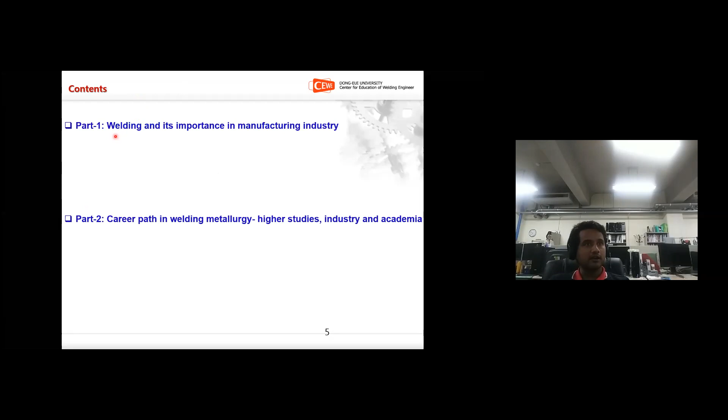This is the contents of my presentation. I have divided the whole presentation into two parts. Part one is welding and its importance in manufacturing industry. Part two will discuss the career path in welding metallurgy, higher studies, industry and academia. Finally, I'll summarize my presentation.

We'll start part one, welding and its importance in manufacturing industry. Here I'll discuss the importance of welding in manufacturing, then the basic definitions of key terminology such as welding, weldability, and welding metallurgy, the different welding processes, the structural building blocks of welding technology, and finally the important part: the need of metallurgist in the welding industry.

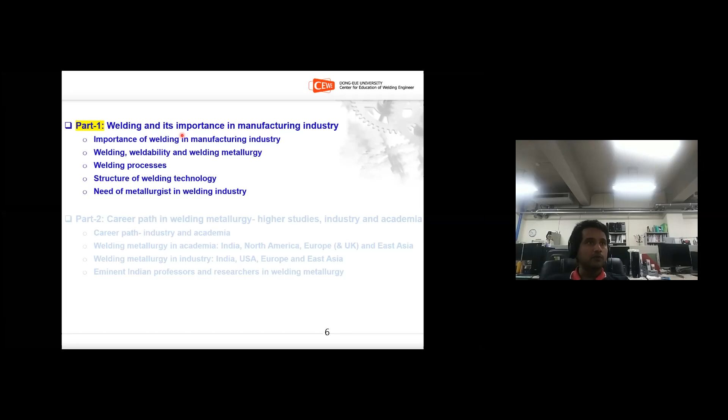I will start part one, the importance of welding in manufacturing industry. To explain this, I think it is easy to use an example, so here I'm taking the example of the automobile industry. If you take the automobile industry, these are the four basic blocks of automobile body manufacturing.

For example, here we are making a car body with steel, and basically steel sheets are used for making the car body, which comes from the steel industry. In the steel industry there are processes like iron extraction, steel making, casting, rolling, heat treatment, and sometimes coating. After these metallurgical processes, sheet steels come to the industry and are first fed to a press shop.

This is actually the structure of a car body, which we can call the skeleton of a car. Let's see what happens in the press shop. These car bodies consist of various components; for example, here you can see the B pillar, this is the A pillar, this is the B pillar, and this is the C pillar.

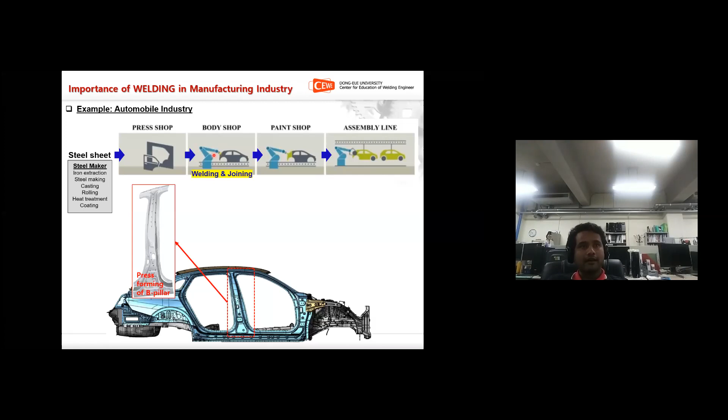So welding and joining are happening here. If you magnify this portion, you'll see a lot of yellow and green dots - these represent the locations of resistance spot welds. In the body shop, most of the automobile industry uses resistance spot welding for assembling the body parts. So the components enter the body shop as separate parts and leave as an integral, assembled component.

The assembled component is then sent to the paint shop, where it is coated with primer, secondary, and tertiary paintings. Finally it goes to the assembly line where the remaining non-metallic parts are added, and then it is sent to the next level.

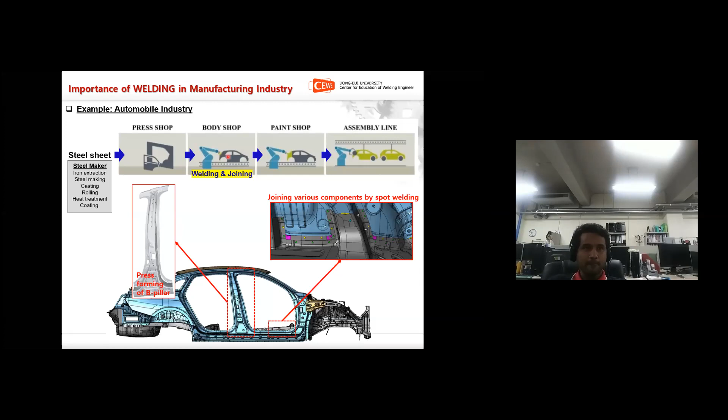Here we'll see the basic definitions of important terminologies like welding, weldability, and welding metallurgy. We'll start with welding. What is the definition of welding? What do you mean by welding? Simply, we can say it is the joining of two materials into one by using heat or pressure or both.

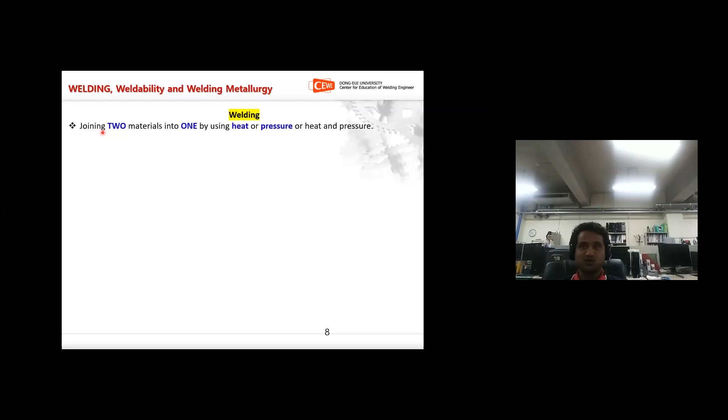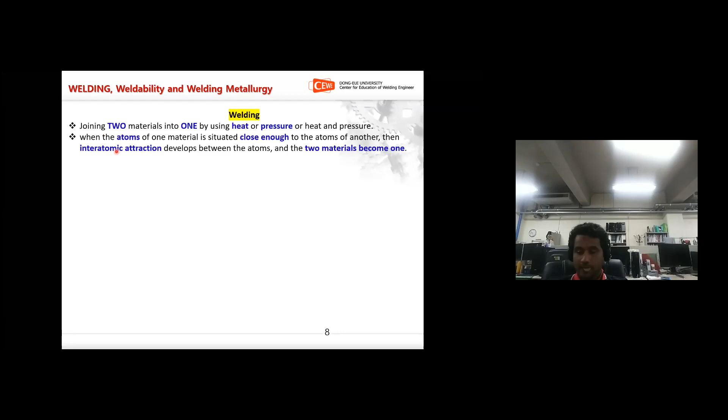But how are we joining two different materials into one? When the atoms of one material are situated very close to the atoms of another, interatomic attraction develops between the atoms, and the two materials become one. Let's see this with a schematic diagram: on the y-axis is cohesive force, which is the interatomic attraction force, and on the other axis is the separation between the atoms, which is the distance between them.

This region will have the maximum interatomic attraction between the atoms. If you keep two atoms at this distance, they will have the maximum interatomic attractive force. Now let's consider the atoms of material A and material B.

Let us assume the atom of material A is situated here and B is located here. If you see the distance between A and B, they are located far apart, which means there will not be any interatomic attraction between them. In order to have interatomic attraction, we need to bring B into this region so that it will have the maximum cohesive force or maximum interatomic attraction force.

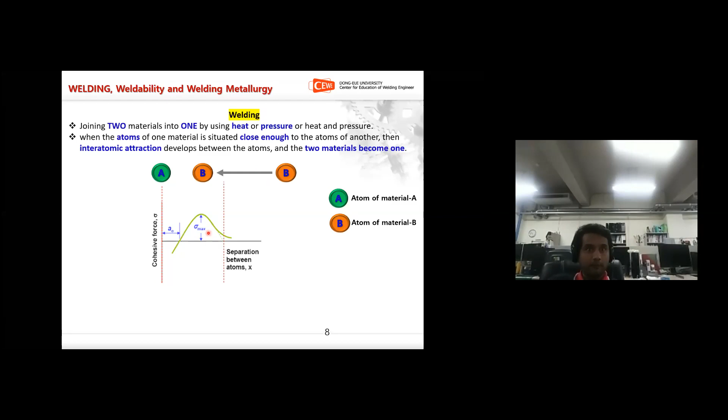But it is not easy to bring B into this close distance because there will be a lot of repulsive forces acting against the movement of B, such as the surface energy of material A, impurities on the surface of material A, and some other surface irregularities. But in welding, we are providing heat or pressure or both so that we can overcome such repulsive forces.

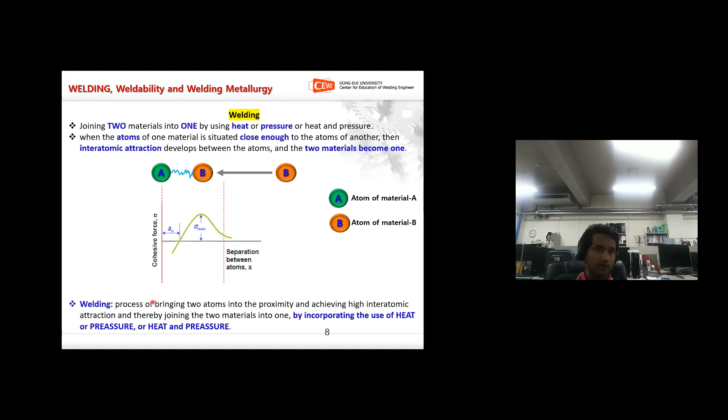Bring B into close proximity of A so that there will be a strong interatomic attraction. So using this concept, we can easily define welding: it is a process of bringing two atoms into proximity and achieving high interatomic attraction, thereby joining the two materials into one by incorporating the use of heat or pressure or both. I hope you understand the basic definition of welding.

Next is weldability. According to the American Welding Society, weldability is the capacity of a material to be welded under fabrication conditions imposed into a specific, suitably designed structure and perform satisfactorily in the intended service.

Simply, we can define weldability as how easily we can weld a material and how well the material can perform its intended application after welding. That is a simple definition of weldability. So in the manufacturing industry, we consider weldability as an important property of the material.

If you consider the job of a metallurgical engineer or researcher working in welding metallurgy, he'll always be evaluating the weldability of materials, especially new materials.

Here you can see an example. Normally we say steel is having higher weldability than nickel, which is having higher than aluminum, and so on.

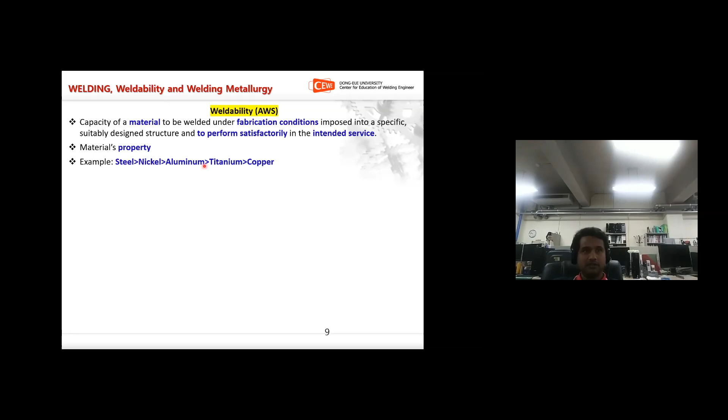Another terminology is welding metallurgy, which is considered a subset of metallurgy that studies the metallurgical phenomena during welding. Why is welding metallurgy important? Why can we not consider it as just physical metallurgy? Why is there no other heat treatment metallurgy or casting metallurgy, something like that?

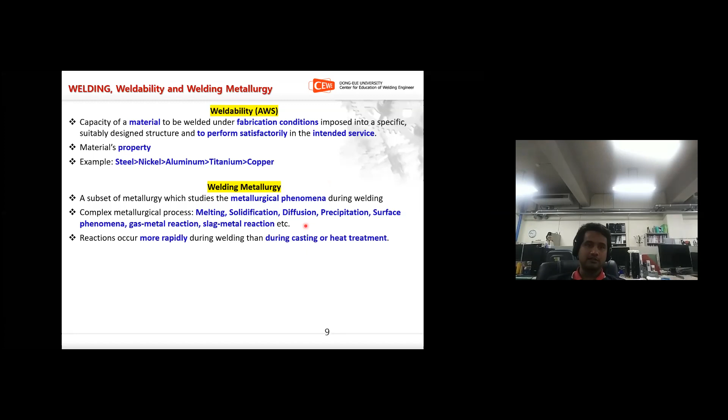Because welding consists of a lot of complex metallurgical phenomena, such as melting, solidification, diffusion, precipitation, etc. And these phenomena or reactions happen more rapidly during welding than in any other manufacturing processes like casting or heat treatment. So this rapidness in these metallurgical phenomena makes welding unique and challenging.

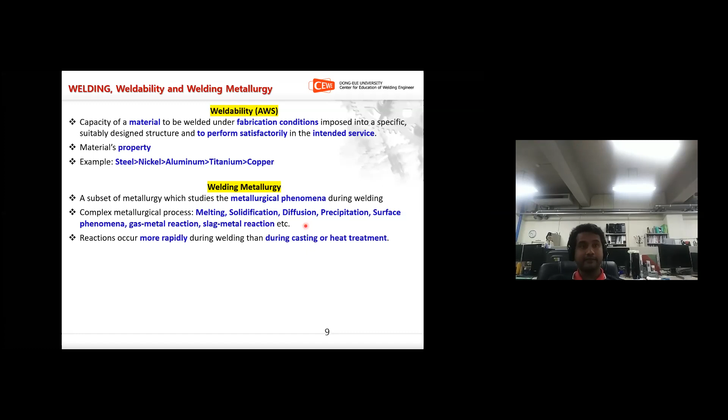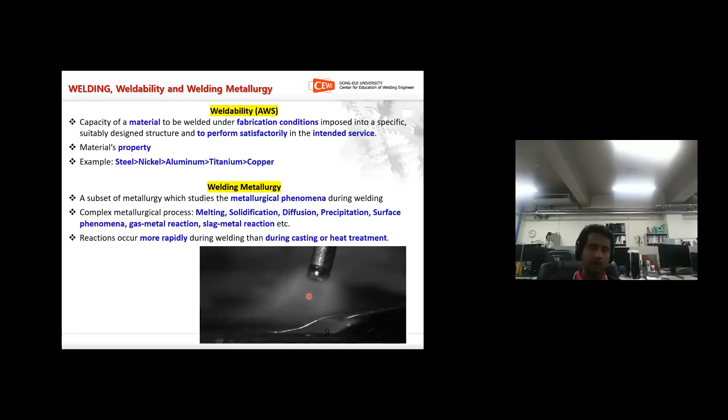First, an arc is established, and the heat energy from the arc melts the filler wire. So melting is happening here. It becomes like a molten droplet, which is transferred to the existing molten pool, and which will be solidified here.

After solidification, there may be other phenomena like phase transformations. It can be diffusional phase transformations, or it can be diffusionless transformations.

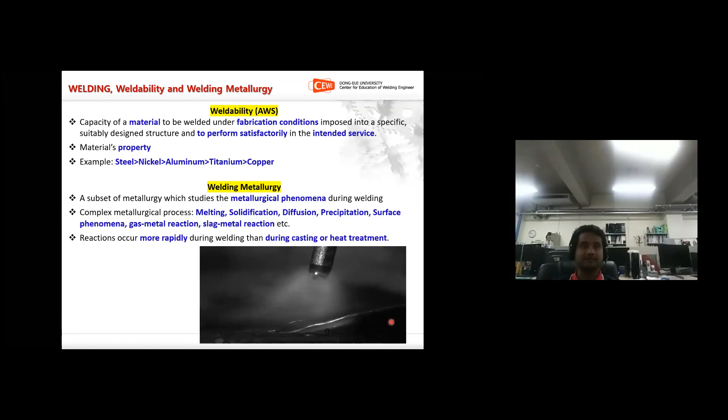Now, welding processes. You will see a lot of different welding processes in different industries. Based on the industry and based on the material, we will have different types of welding processes.

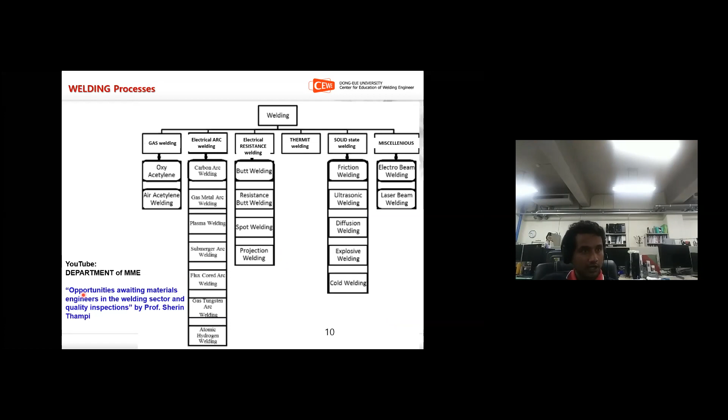I'm not going deep into different processes because you will see one of the previous webinars conducted by Amal Jyothi College. You will find the video on the YouTube channel of the Department of MME, titled 'The opportunities awaiting materials engineers in the welding sector and quality inspections' by Professor Sherin Thampi. If you're interested, you can visit that. There, Professor Sherin Thampi has explained all the types of welding processes.

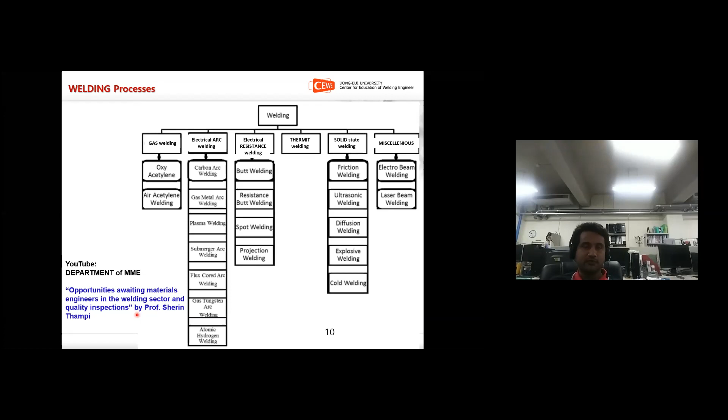Next is the structure of welding technology. If you look at the structure, you will see 3 major building blocks in welding technology: process, metallurgy, and design.

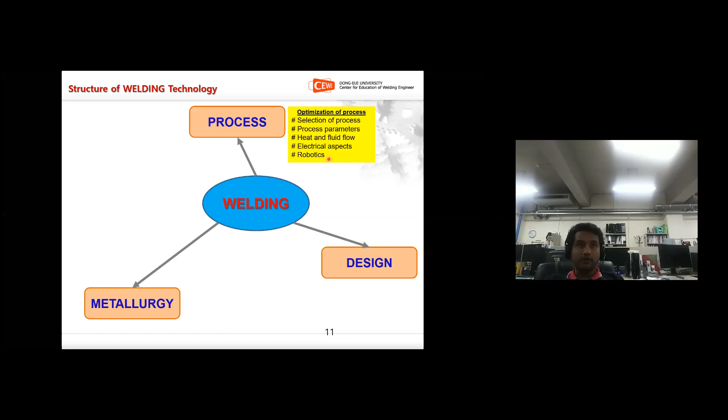Process is basically the optimization of the process, an interdisciplinary area in which mechanical engineers, metallurgical engineers, electrical engineers, or even electronic engineers can contribute. Here, selection of processes based on application and material, process parameters, heat flow and fluid flow will be studied. Electrical aspects like welding power sources, welding machines, and robotics are included too, since most welding today has become automatic using robots. So we should have experts in robotics to make automated weldings.

The second part is metallurgy. Here we study the response of materials during and after welding, especially changes in mechanical properties, corrosion properties, and changes in structure—what we call microstructure, and sometimes nanostructure, since we may need to go up to the atomic level to see the structure of material after welding. Another aspect is cracking and other defect formation, and chemical inhomogeneity happening during rapid solidification and phase transformation. This part is exclusively for engineers and researchers with a strong background in metallurgy.

The next part is design of welding. This is exclusive for mechanical engineers. Dimensions of the welds, number and locations of the welds, loading and stress distribution, and residual stress distribution will be analyzed in this part.

So till now we have seen the importance of welding process in manufacturing industry, and the basic definitions of various terminologies and welding processes. But here we are going to see the need of metallurgy in welding-related industry. I think the best way of explaining this is by picking some examples from various industries.

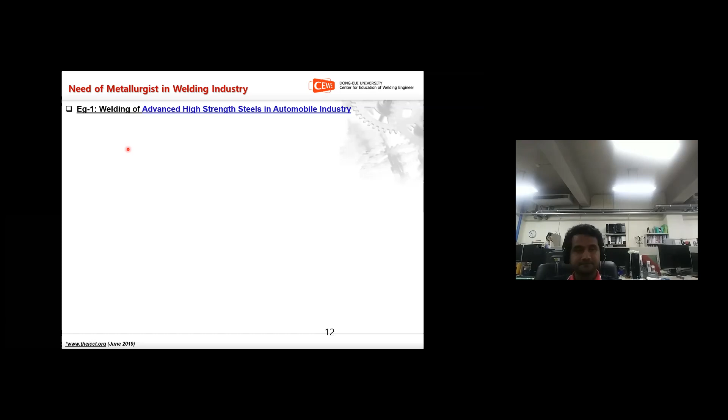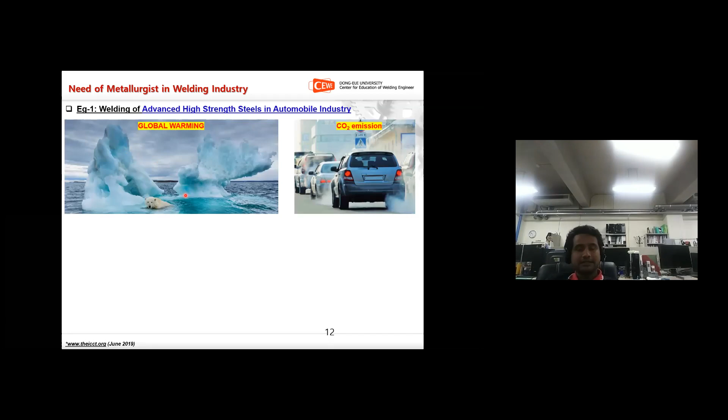As a result, various government agencies have put very strict regulations on fuel consumption and carbon dioxide emission. As a result, you will see reduction in carbon dioxide emission as well as fuel consumption in various countries—Korea, Europe, Japan, India, and others. Some countries have set future quantitative targets as well.

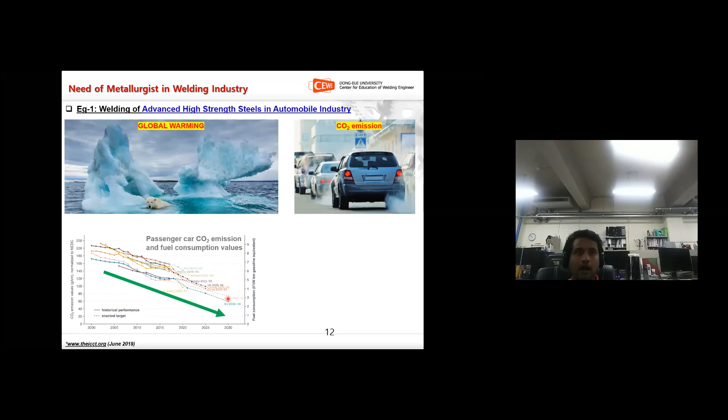How are automobile industries achieving this reduction? It is through lightweight technology—automobile manufacturers are reducing the overall weight of the automobile. For example, a reduction of 380 kilograms of car body weight can result in a 40% reduction in carbon dioxide emission. So this is a very effective strategy to control carbon dioxide emission.

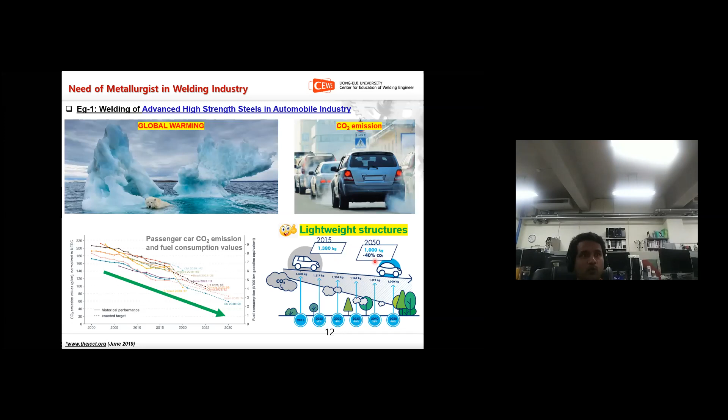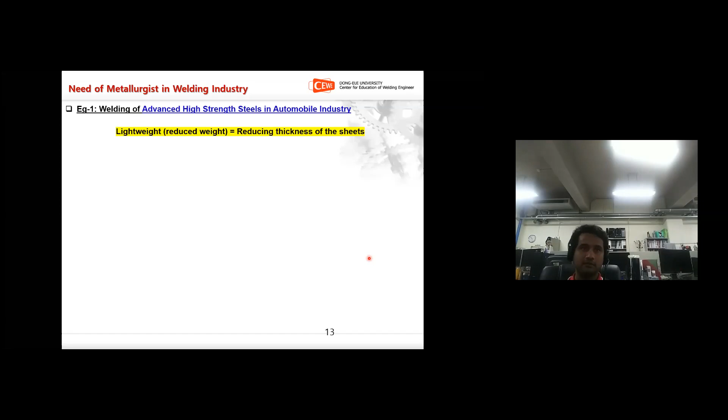How are they achieving this weight reduction? By reducing the thickness of the steel sheets. We have already seen that sheet materials are used in car body manufacturing, so they reduce weight by reducing sheet thickness. But there is a problem—we cannot simply reduce the thickness of the sheets.

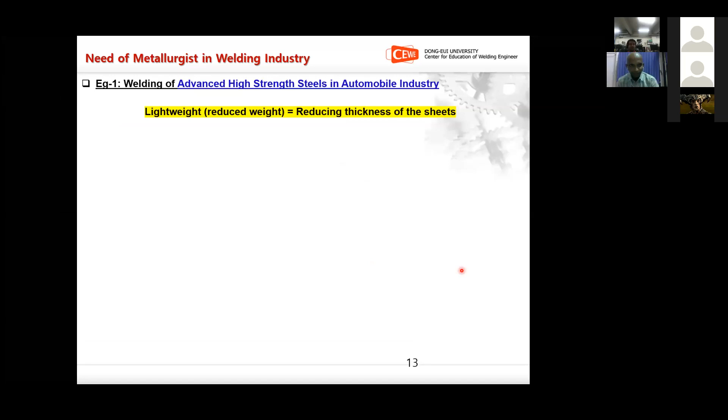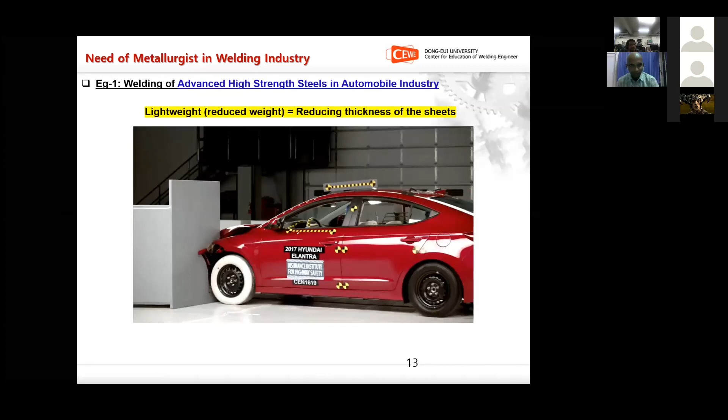This is called a crash test, used for evaluating crashworthiness and passenger safety when an automobile is involved in an accident or crash. A collision or accident is simulated here. If you simply reduce the thickness of the sheets, we cannot ensure passenger safety. So this is another problem opposing the lightweight strategy.

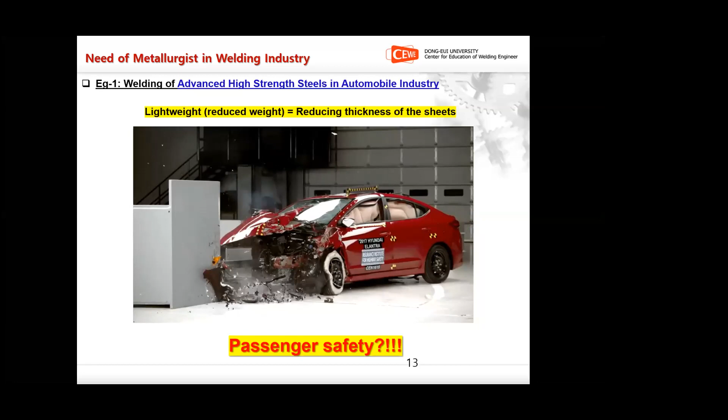There are a lot of requirements for automobile manufacturers. One is reducing weight by reducing the thickness of the sheet metal, but they cannot compromise passenger safety—the property needed is strength of the material. Another requirement is easiness in making shapes. We have already seen the press forming process—if the material has high formability, it will be easy to form into desired shapes.

Now there is a problem: these two properties, strength and formability, oppose each other. There is a trade-off between strength and formability—if we try to increase strength, there is an automatic reduction in formability, and vice versa.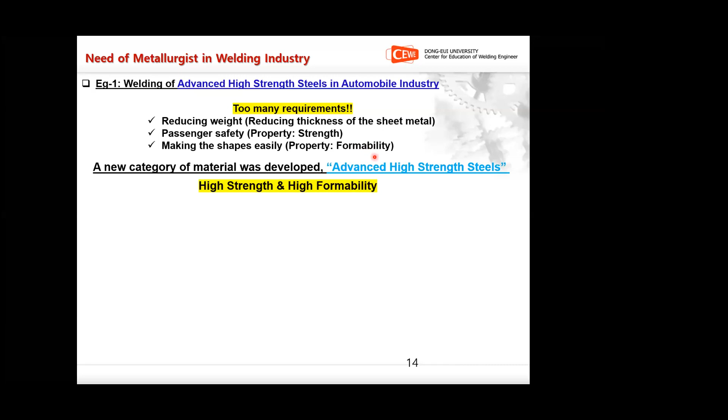But anyway, we have to achieve all these requirements. So steel researchers have come up with a new category of steels called advanced high-strength steels with high strength and high formability. This chart shows various types of steels, in which green represents the conventional steels: mild steel, low carbon steel, interstitial free steels, and high strength low alloy steels.

And from 2000 onwards, a new category of materials, these advanced high strength steels, evolved, and these are some of the examples.

This red color and blue color indicates those advanced high strength steels. So you will see in the x-axis it is strength, tensile strength, and y-axis it is elongation, which is a measure of formability. So we can have a satisfactory level of formability and strength if we choose advanced high strength steels. This is the background of advanced high strength steels, and this is developed by improving the chemical composition and applying some special heat treatments.

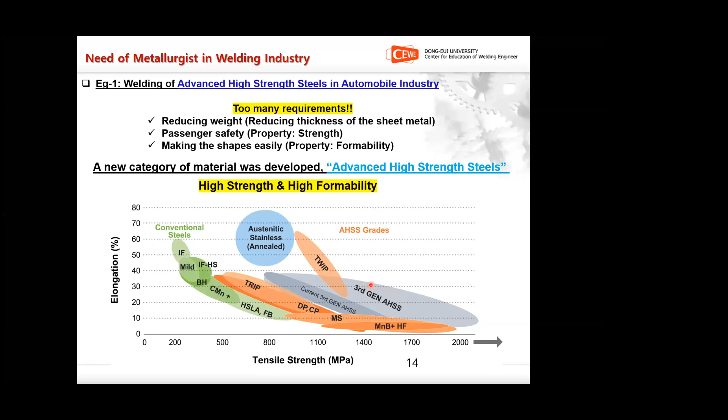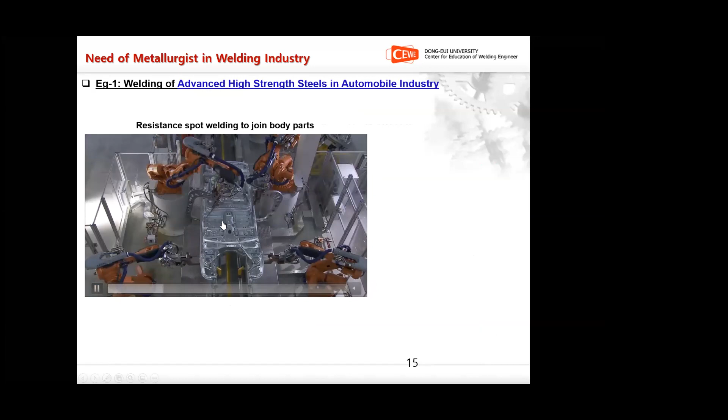And now we need to weld the advanced high strength steels to make the automobile structure. Most of the automobile industry uses resistance spot welding. This is an automated resistance spot welding in an automobile industry. You will see the electrodes are coming and making the welds. These are the electrodes, coming and making the spot welds like this.

Now let's see the schematic of this same process. These are the two steel sheets, and we have a water-cooled copper electrode. Electrode force or pressure will be applied so that this electrode holds the materials together, and then electric current is passed. When current is passed through a resistor, based on the Joule heating principle, there will be heat generation. Using that heat generation, the steel sheet interface will be melted and resolidified as a weld nugget. So this is called a weld nugget.

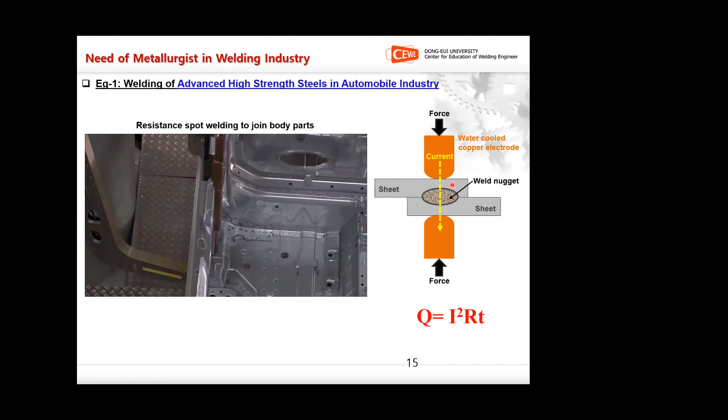If you make a large weld nugget, we can call it a good weld. If the weld nugget is small, we call it a poor weld. So this is the phenomena happening during resistance spot welding.

Now let's see the magnified view of resistance spot weld. I mean this region, and this is the water-cooled electrode. These two are zinc-coated advanced high strength steels. Why are we applying zinc coating? Because we need to control the corrosion. That's why we are applying zinc coating.

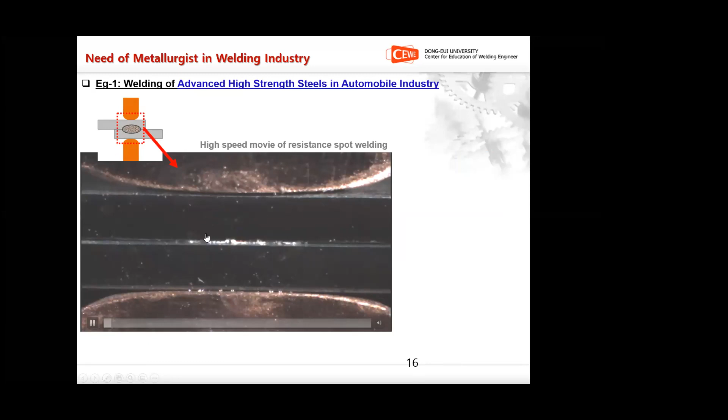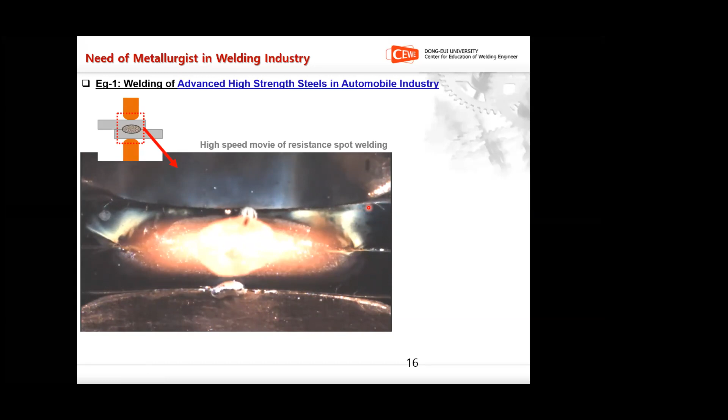So let's see what is happening. This is a high-speed camera movie. Current is passed, and you will see the melting of the coating. Here the coating is melted, and here the steel has been melted. At the same time, if you look carefully, you will see a lot of crack formations - here, here, here, and after some time here also. So these electrode-sheet interfaces experience a lot of crack formation.

So these are called cracks, and almost all the interfaces are having cracks.

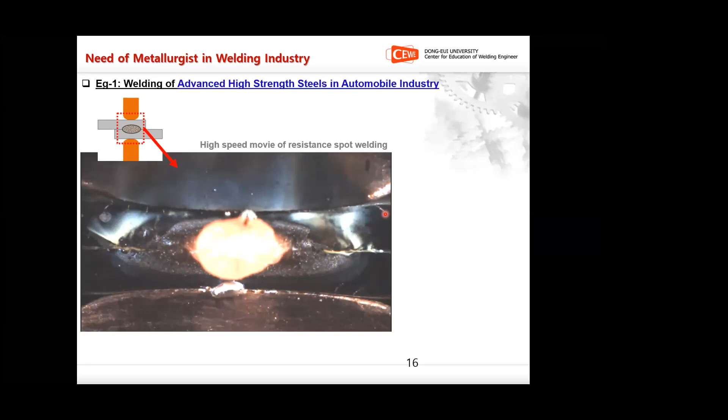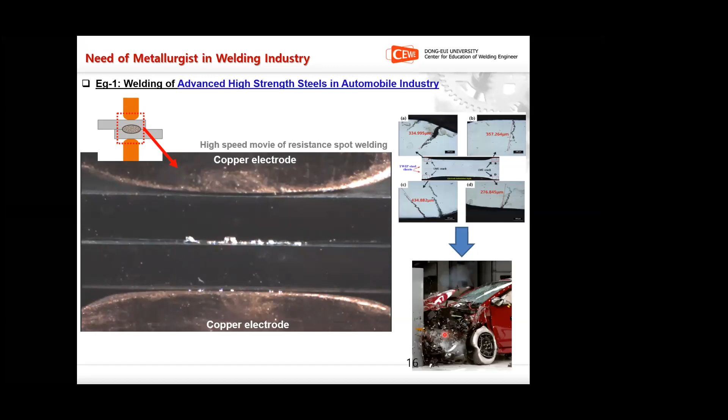We have to eliminate these cracks. But how to eliminate them? If you want to solve some problem, you need to first identify the reason behind the problem. So we need to conduct a detailed metallurgical analysis to reveal all the metallurgical phenomena of cracking. If you know the mechanism of cracking, then we can avoid it.

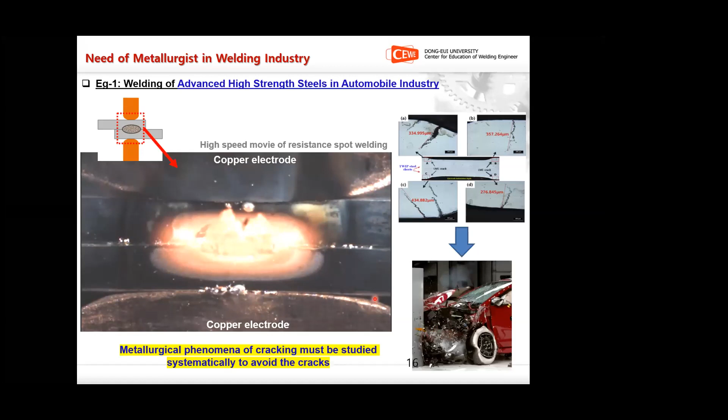So when we looked at this, we found that these are caused by liquid metal embrittlement cracking, which is due to the liquid zinc. The liquid zinc is penetrating the steel sheet and making the cracks. So we need engineers or researchers with a strong background in metallurgy in order to solve these problems.

So that is the case of automobile industry. This is not the only problem we face in the automobile industry. There are others like defect formation - shrinkage cavity formation, or poor strength of some new grade materials, etc.

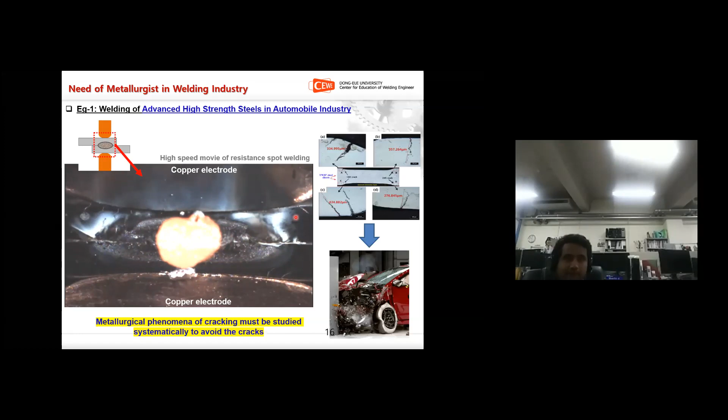So this is another example, the friction stir welding of aluminum alloys in the space industry. Here you are looking at a dome of a cryogenic fuel tank using aluminum lithium alloy. Conventionally in rocket fuel tanks, aluminum copper based alloys are used for making these domes. But recently this aluminum lithium alloy has started replacing the aluminum copper alloys because of its lightweightness or low density.

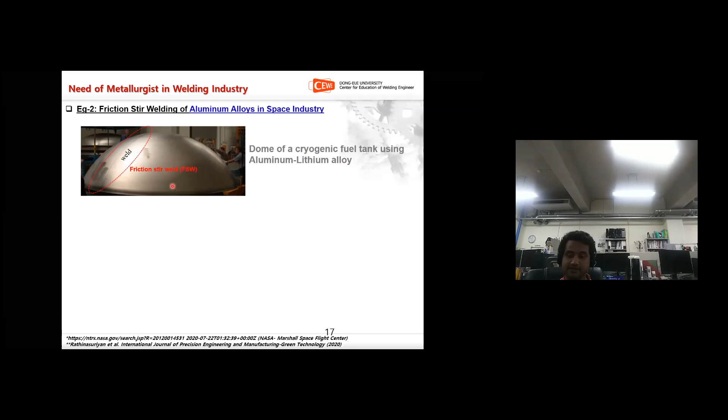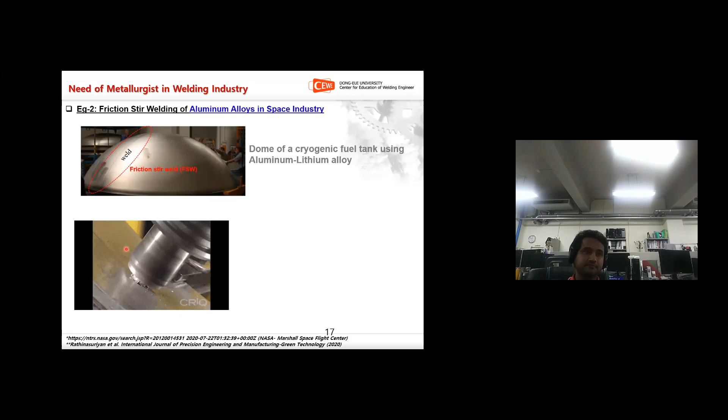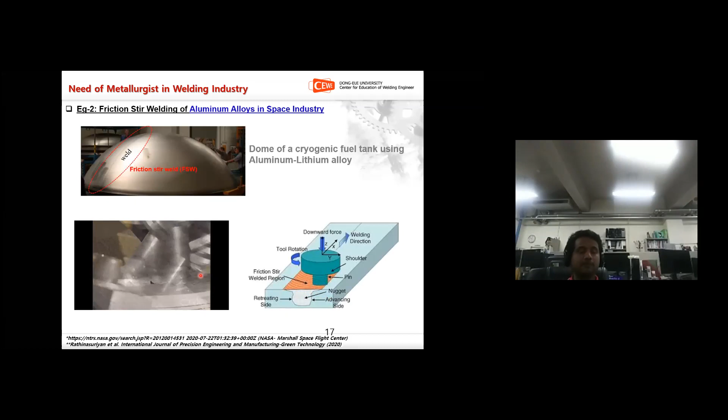This video shows different parts welded together using friction stir welding, which is a solid state welding process. An external tool is used to make the weld between these two materials, which are welded together. After welding, if you see the cross section, you will see a welding nugget formed at the interface between the two materials. This is how the friction stir welding process works.

After welding this aluminum lithium alloy, if you look at the cross section, which we call a microsection, it has very fine structures inside the weld nugget. We cannot even distinguish the grains using this magnification image. So after welding, we can call it a fine structured microstructure, which we call fine grains.

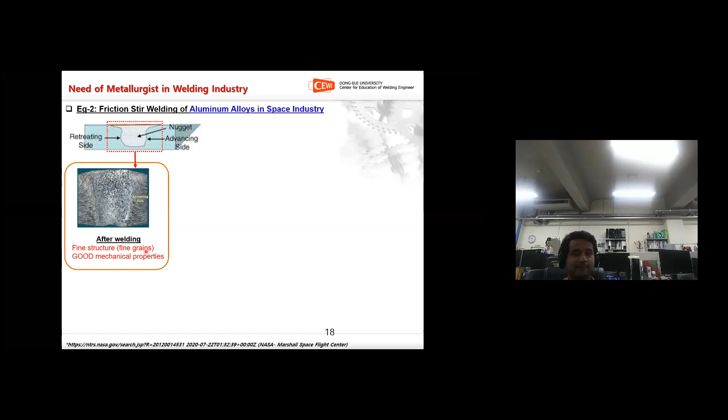Fine grains are good for mechanical properties. If you have fine grains, then the mechanical properties such as strength and ductility will be high. But after welding, they normally do some kind of heat treatment in order to relieve all the internal stresses that happened during friction stir welding.

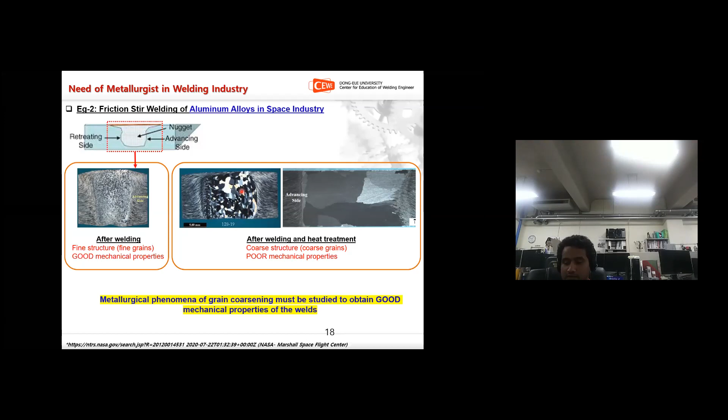So this coarse grain structure is not good for mechanical properties - it will end up with very poor strength and ductility. So we need to study the metallurgical phenomena of grain coarsening, and only then can we control the grain coarsening phenomena and achieve good mechanical properties. So here also we need someone with a strong knowledge of metallurgy.

So another example is welding metallurgy in metal additive manufacturing, or metal 3D printing. Welding metallurgy and 3D printing - what is the relation between welding and 3D printing?

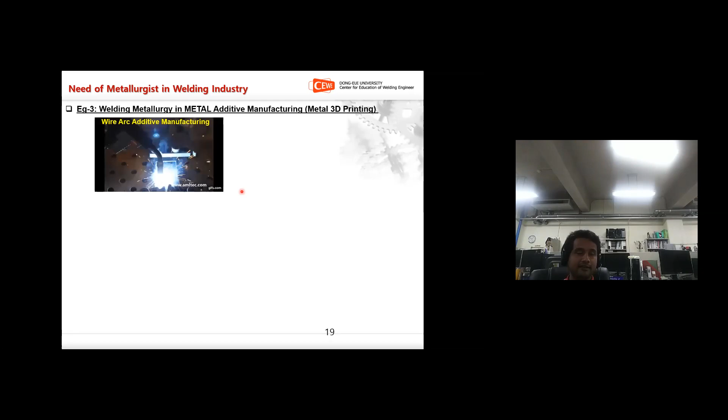We have mainly two types of metal additive manufacturing processes. Number one is wire arc additive manufacturing, which is similar to arc welding - an arc is used to melt the filler wire, which is deposited to build a final product. Another major type is laser-based powder bed fusion additive manufacturing, also known as selective laser melting.

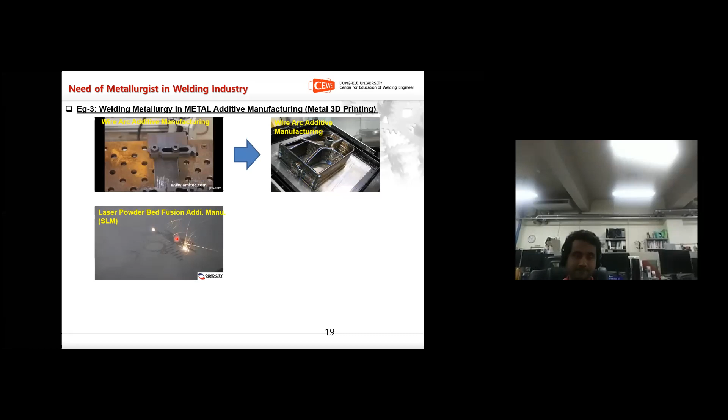This is similar to laser beam welding, in which a laser beam is scanned over a powder bed and it is fused to make the final component. So this is similar to arc welding, and this is similar to laser beam welding. In both ways, both processes are related.

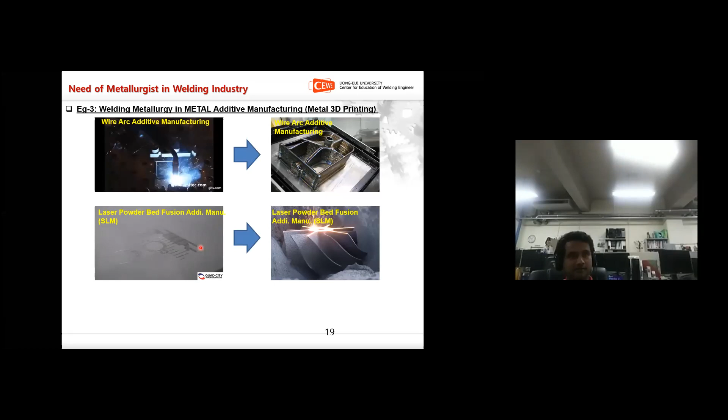If you look at the metallurgical phenomena happening in 3D printing or metal additive manufacturing, you will find a lot of similarities with the welding process, such as rapid melting, rapid solidification, phase transformation, surface phenomena, fluid flow, heat flow, etc. So this knowledge in welding metallurgy can be utilized in metal additive manufacturing to improve the quality of the products. That is a third example.

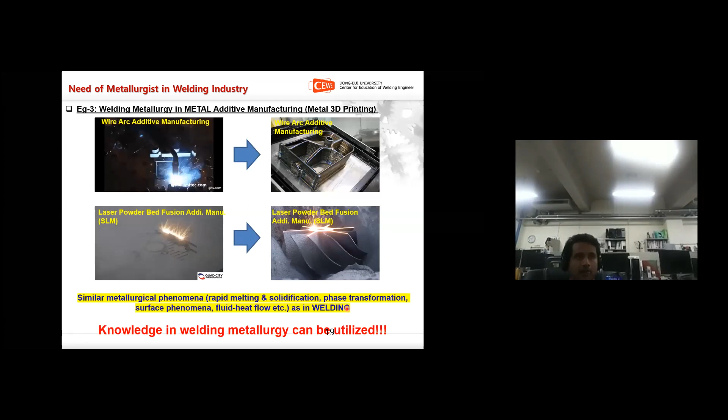Similarly, you will find a lot of examples in almost all manufacturing industries, like aerospace, shipbuilding, boiler and pressure vessels, steel making, etc. In all these industries, different materials are used, so different welding processes should be used, and different problems will be there. In order to solve those problems, we need welding metallurgical engineers.

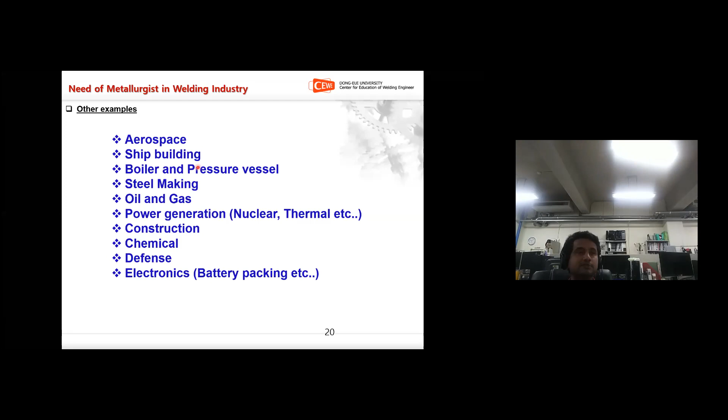So with this, we have covered the first part - welding and its importance in the manufacturing industry. We have seen various types of welding and problems associated with welding, and how metallurgy graduates or metallurgical engineers can be useful in these industries.

Part two is basically the career path in welding metallurgy - higher studies, industry, and academia. Here we are dealing with the opportunities. Mainly welding metallurgy in academia and welding metallurgy in industry will be discussed. Welding metallurgy in academia means you can have higher studies opportunities as well as job opportunities, because in academia you will find a lot of job positions, not only faculty or professor positions.

You will find a lot of researcher positions, and research professor positions. So welding metallurgy in academia will cover universities and institutes all around the world, and I will be dividing the whole world into 4 different regions: India, North America, Europe, and East Asia. For the industrial part, I will discuss industries in India, USA, Europe, and East Asia. Finally, I would like to introduce some eminent Indian professors and researchers in the field of welding metallurgy.

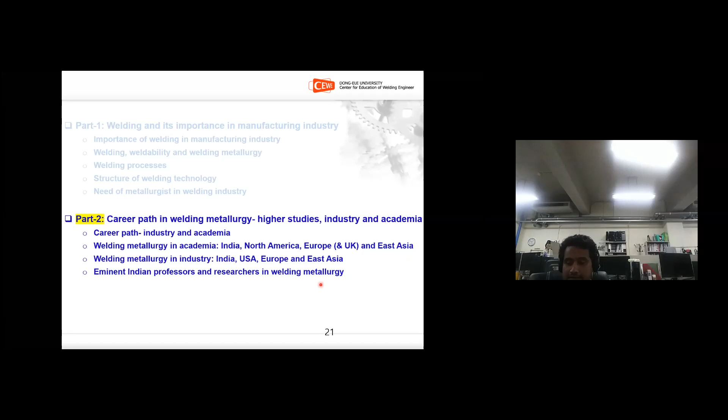If you complete your schooling, intermediate course with physics, chemistry, and mathematics, you can choose a bachelor's degree in metallurgical and materials engineering. Once you complete your bachelor's degree, you can go for higher studies or core jobs, either in industry, private job or government job, or IT related jobs, or startups, because you can use the knowledge you acquire while doing the metallurgical engineering course.

It can be used for starting your own business, because I have seen a lot of students start their own companies by making 3D printing products, non-metallic 3D printing products. So startups are also good options for graduate students.

If you want to choose higher studies, in India you can do either MTech or MS in material science and engineering, or industrial metallurgy or welding engineering, or some other courses will be there.

In India, most universities and institutes will be looking for either GATE score, or in Tamil Nadu, the universities will be looking for TANSET scores. And in some places you need to give an interview for getting selected into the university.

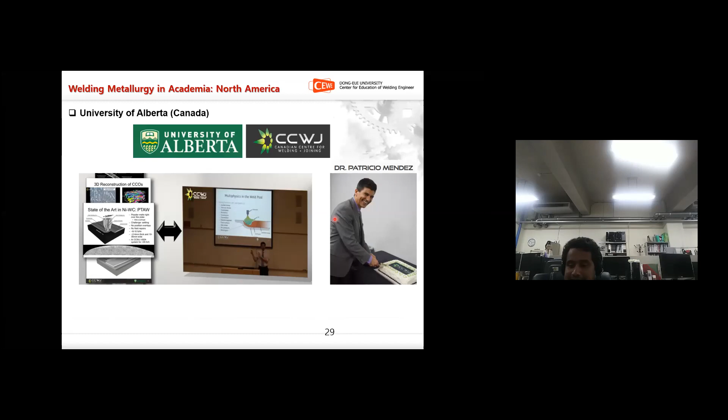The Ohio State University in USA has a center called Manufacturing and Materials Joining Innovation Center. The headquarters is at Ohio State University, but it is a collaborative research center involving Ohio State University, University of Tennessee, Lehigh University, Colorado School of Mines, and University of Waterloo. They mainly deal with materials weldability, manufacturing and joining processes development, and additive manufacturing.

Next is Colorado School of Mines. They also have a couple of centers dealing with welding related research. Number one is the Advanced Steel Processing and Product Research Center, headed by Professor Speer. This center is not only for welding, they deal with all processing of steels. Another center is the Center for Welding, Joining and Coating Research.

This list is also not complete. You will see a lot of other universities in North America, like Penn State University, University of Wisconsin Madison, Tennessee Tech in USA, and McMaster University, University of Toronto in Canada.

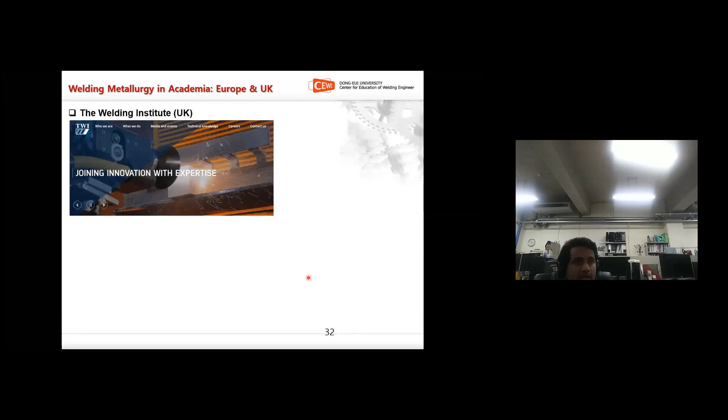Another option is Cranfield University in UK, which has a center called Welding Engineering and Laser Processing Center. And RWTH Aachen University in Germany has an institute called ISF, Welding and Joining Institute, headed by Professor Reisgen. They deal with the experimental and simulation works of welding and joining.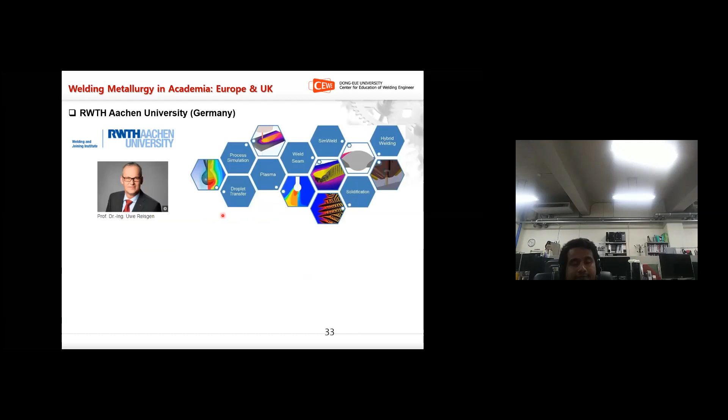In TU Berlin, Germany, they have a Federal Institute for Materials Research and Testing, with a division called Welding Technology headed by Professor Rethmeier. He deals with the welding metallurgy of various steels, and recently he started his research in additive manufacturing as well.

This is TU Delft in Netherlands. They have a center called Joining and Additive Manufacturing, headed by Professor Hermans. They mainly deal with welding, joining, and additive manufacturing.

Next is the Technical University Graz, Austria, with an Institute of Materials Science, Joining and Forming, headed by Professor Sommitsch. There are some other universities as well in Europe, like KU Leuven in Belgium, EMPA, Swiss Federal Laboratories for Materials Science and Technology in Switzerland, then Coventry University and University of Warwick in UK.

If you come to the East Asian side, the main institute is the Joining and Welding Research Institute at Osaka University. They have various departments for different aspects of welding, literally dealing with all aspects of welding. For example, they have a department for civil engineering related to welding, a department of electrical engineering related to welding, metallurgical engineering related to welding, physics related to welding, and they deal with all sorts of areas related to welding.

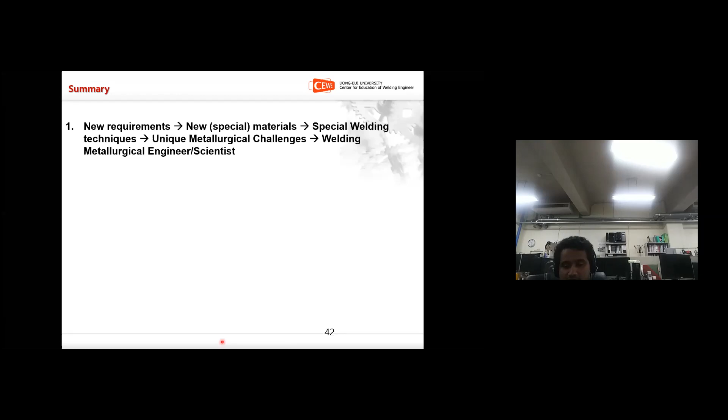So to overcome those challenges, we need welding metallurgical engineers and scientists with very strong knowledge in welding metallurgy. Another point is, like any other engineering stream, interdisciplinary collaboration is very important in metallurgical and materials engineering too. It's better to acquire interdisciplinary skills such as mathematical skills, programming, statistics, and data analysis skills, so that in either industry or research, you can have more interdisciplinary collaborations.

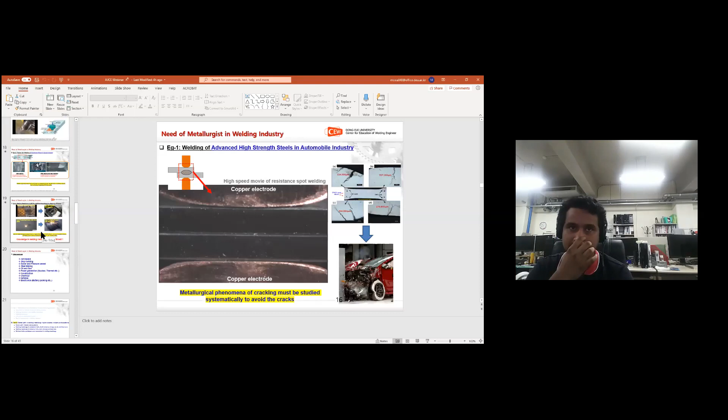Just wanted to confirm whether it is optical images or electron beam. I haven't used any electron microscopic images.